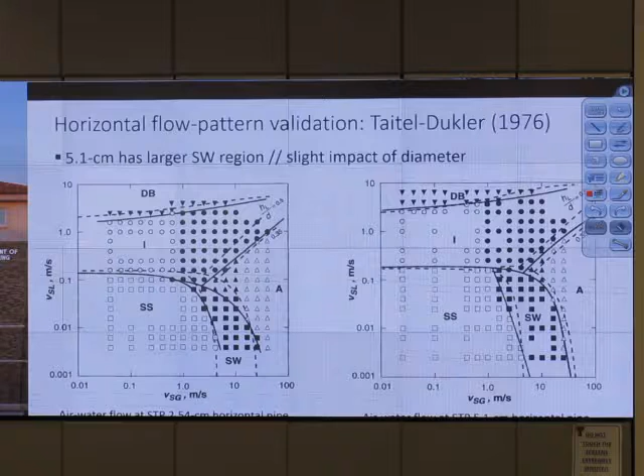Okay, for fully developed flow, you have velocity as a vector to be a function of time only. So the partial derivative of velocity with respect to length from the inlet is 0.

Good. Steady state means partial derivative with respect to t equal to 0. That's steady state - doesn't change with time. Doesn't change with length - is fully developed or not fully developed.

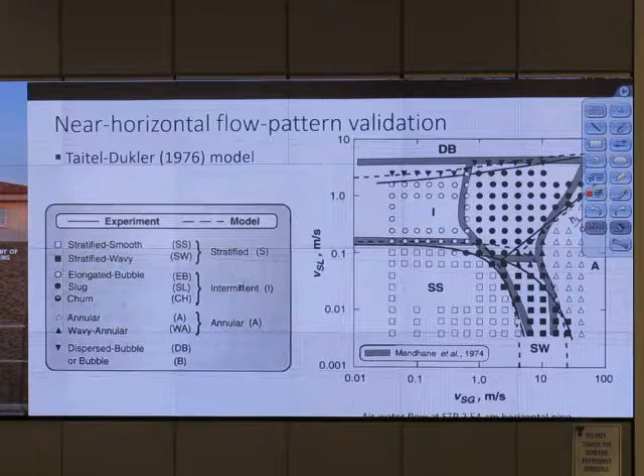Alright, let's take a look at the flow pattern map. This is for air-water flow at STP. If it is oil, the map will change, right? You have to play with the map. Did you do the homework? Submit it.

Okay, when you change the viscosity, the map changes. Why do you think the map changes, Akin? When viscosity goes up, this line kind of changes, right? Why do you think it changed?

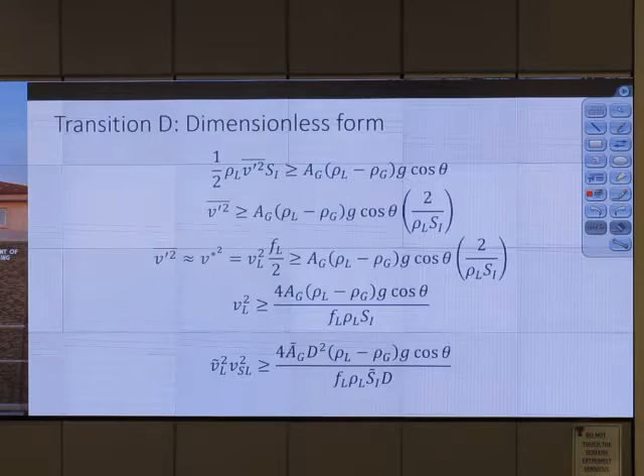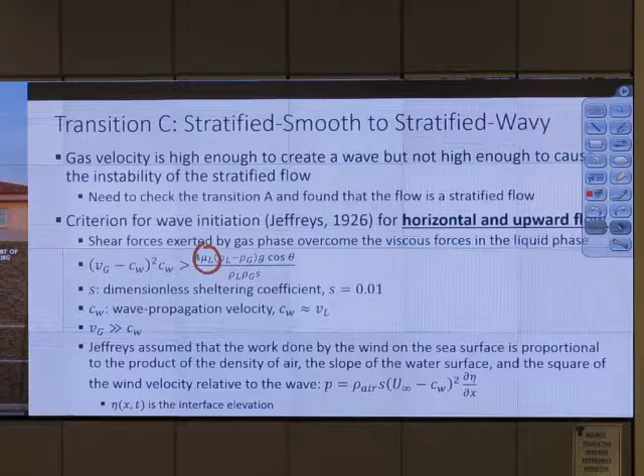Because of buoyancy - sorry, viscous force. Because several of the equations we use involve viscosity. Look at this, Transition C - that's a viscosity term, right? Okay, what about transition A? Is there anything about viscosity in it?

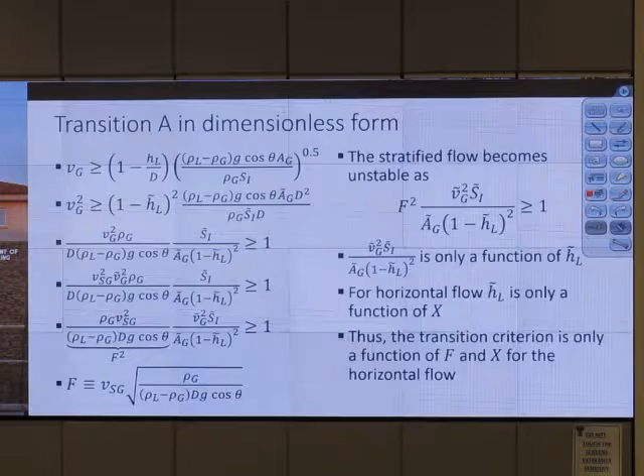How do you get HL? That comes from the chart, the plot between X and Y, right? X is dependent on viscosity, right? So equilibrium liquid height is based on Reynolds number, friction factor - so that's liquid viscosity. So that's it.

You will notice that none of your transition correlations or equations have any pressure or temperature. Do we have pressure and temperature in transition A formula, transition B formula, transition C, transition D? No temperature, no pressure.

Okay, the series Taitel-Dukler model - does it account for temperature and pressure? No. Une, does it account for temperature and pressure? Vegard, yes or no?

So it already accounts for temperature and pressure effect. So this model, even though it doesn't explicitly depend on temperature or something, it already accounts for all those things through fluid property. And at the end, it's not about temperature and pressure, right? It's about, at that condition, what is the fluid property.

One thing we don't have from the Taitel-Dukler model is we cannot discern the difference between elongated bubble and slug flow. They lump everything in this region as intermittent flow, but their model doesn't tell you that this part is elongated bubble and this part is slug - but measurement tells you. I is intermittent, SS is stratified smooth, SW is stratified wavy, DB is dispersed bubble.

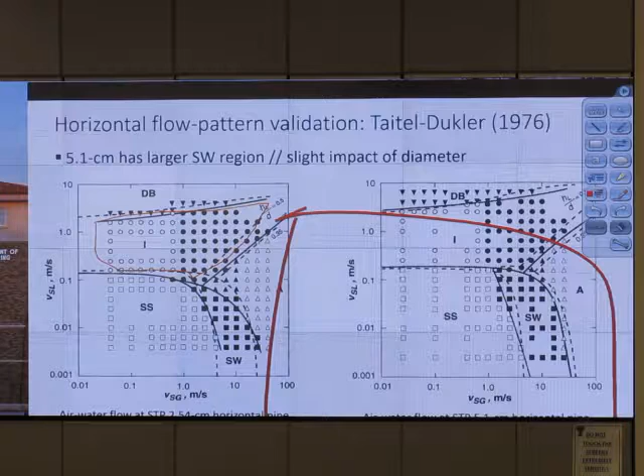So for different pipe diameters, we have different kinds of flow pattern maps. When we have a bigger pipe, the stratified wavy region - the right hand side is 2 inch, left hand side is 1 inch - the 2 inch has a larger region for stratified wavy.

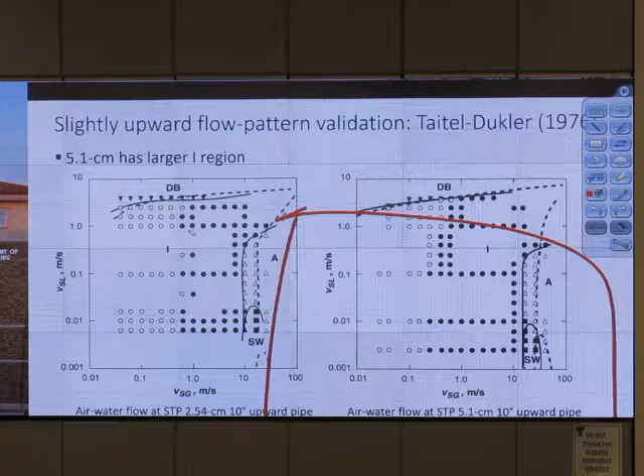So when we incline the pipe, mostly we have intermittent flow. When it is upward flow, we have intermittent. What about downward flow?

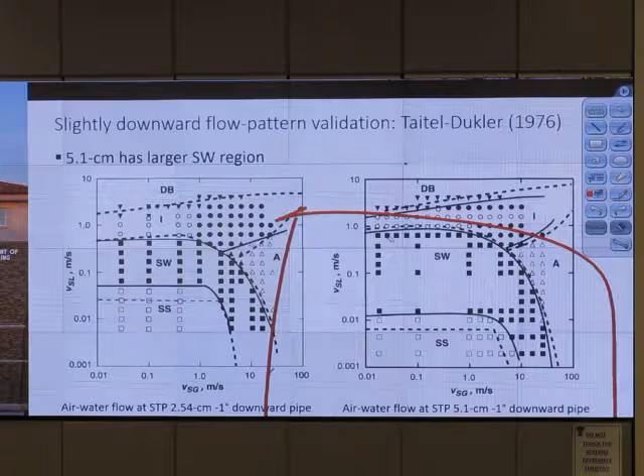So what else? After we do this, okay, that's good. At -5 degrees, stratified smooth is gone for the small pipe. For the bigger pipe, we still have stratified smooth.

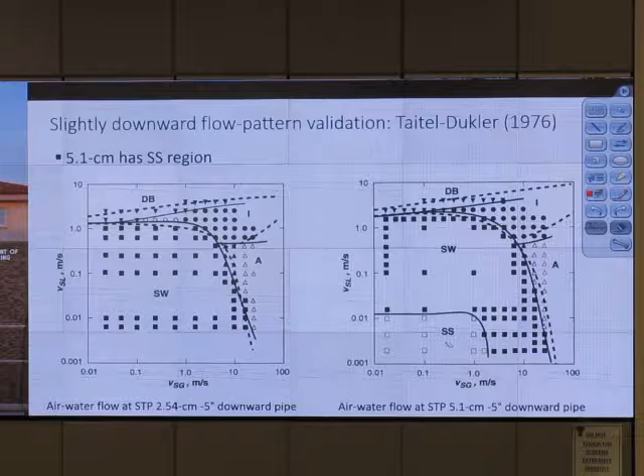At -5, -10 degrees, there's no stratified smooth, it's all stratified wavy. So the majority of the flow pattern for downward flow is stratified wavy. So if you want to guess, in a slightly inclined pipe, what kind of flow pattern do you typically have? Intermittent flow, right? For a slightly downward flow pipe, you have stratified wavy.

Okay, look at the cover of your book.

Does that give you the message? Oh really, look at the cover again. It is a pipe, right? And there's a flow up region. Is that intermittent flow? Yes. What about flow down? Stratified flow, right? No, Professor, I have two questions.

So I cannot even allow you the book, because the cover of the book itself gives you some information, okay? So in the test, don't take the book out of your bag, okay? Yes?

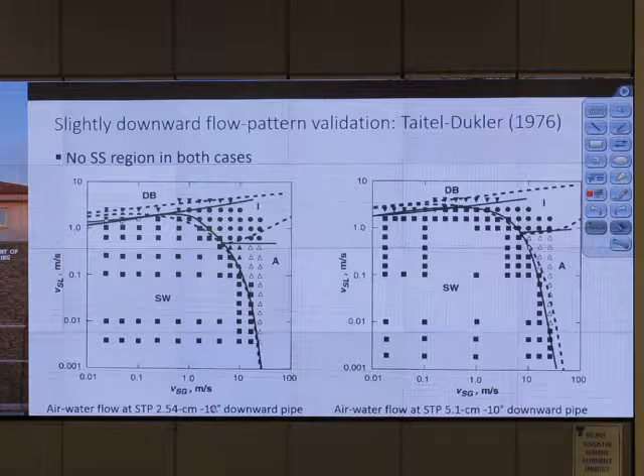And what would be a suggestion? Let's say we have 10,000 feet. So I would like to—what would be a suggestion? I don't want you to be discouraged in asking questions. I will answer that question. How about we wait a little bit until we're in that section? Okay, we are about to tell you how to do pressure drop. It is somewhat time consuming, or maybe complicated.

Okay, all right. So at the end, by now, I hope I've gained your trust that the model can predict the flow pattern for minus 10 to 10 degrees, horizontal and near horizontal. So in the flow pattern prediction, we assume tau I equal to tau G. That is in the flow pattern prediction, right?

So in actual stratified flow calculation, we should use this: tau I equal to half Fi rho relative velocity squared. And you can change Vi to VL. That is in the actual calculation. In the flow pattern prediction, we don't need that level of accuracy. Okay.

For stratified smooth, okay, the textbook suggests assuming Fi to be the same as Fg, and tau I to be the same as tau G. Okay, so this is still valid if Vg is a lot greater than VL. Look at this, if Vg is a lot greater than VL, this term kind of goes away, right? So if it is stratified smooth, let's make this assumption, okay, that's that model.

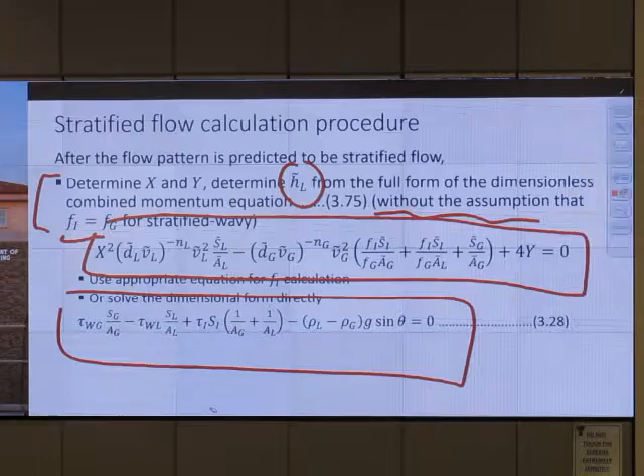Or you can solve it from the dimensional form directly, to get HL. The reason we may have to redo it is because you remember this chart, this graph from Taitel, there's an assumption there: Fi equals Fg. That is the assumption used to generate this chart.

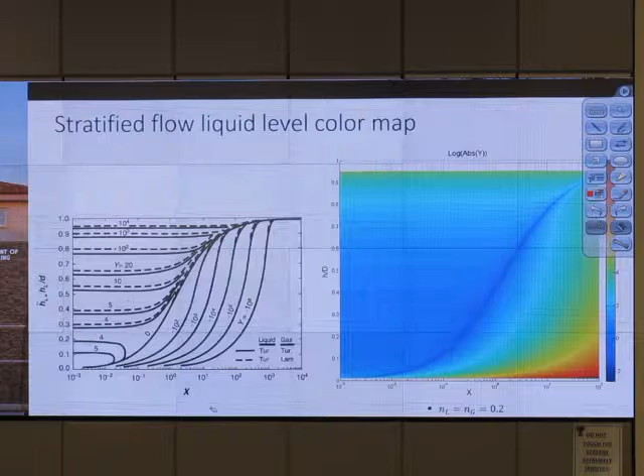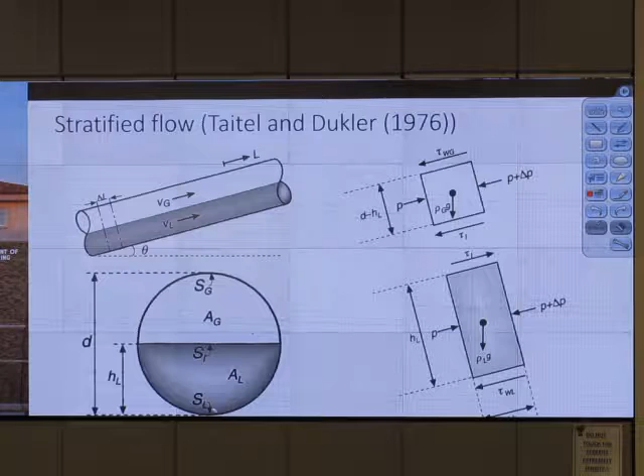Because at that time, what year was it? 1976. In 1976, you don't have a computer. Do we have a computer? I don't even know, you may have had a big computer. We cannot really calculate everything, right? So they made some assumptions to do the calculation.

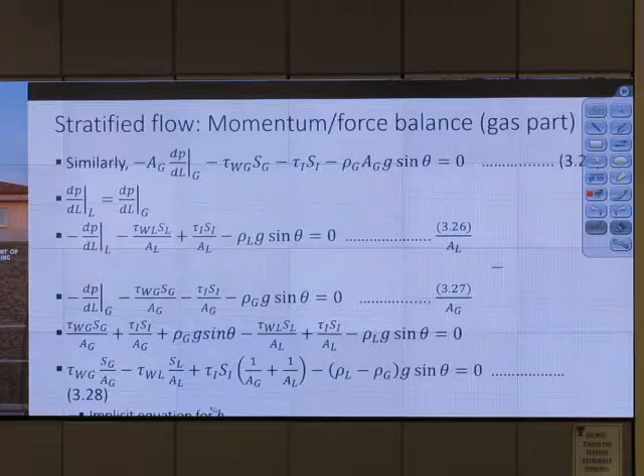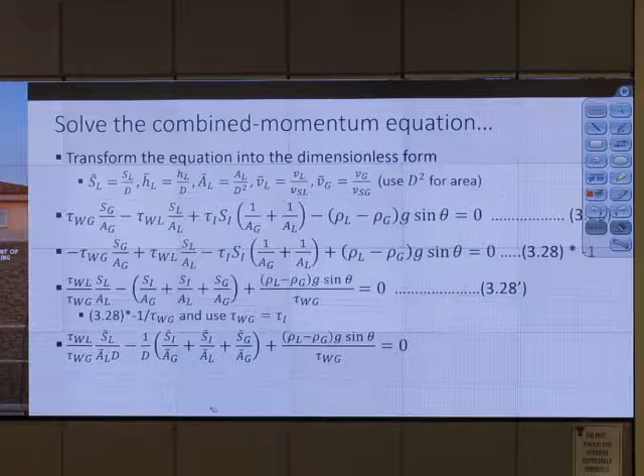So when we have that assumption, it kind of simplifies everything. Fi equals Fg, tau I equals tau G. It simplifies everything. Where did it simplify? Multiply by -1. See this one. So after we use this, tau Wg equals tau I, we get a simplified form.

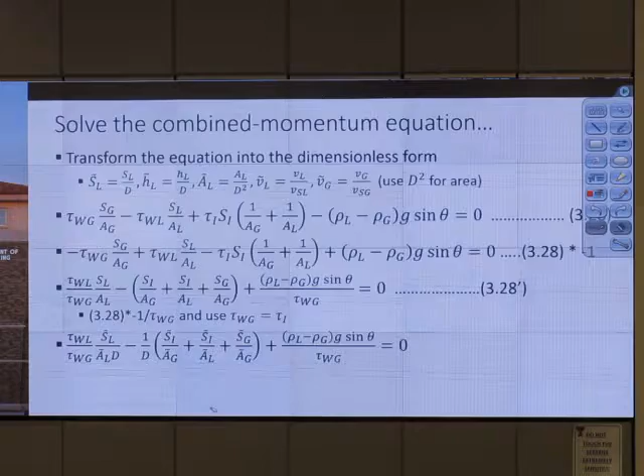But you know, from doing previous homework, that you can work on the full form without any simplification. You don't need to assume tau I equals tau G. You can use the actual form, which is... sorry, too quick.

We can solve the full form of the momentum equation and try to get HL tilde directly. So this time your tau I will be Vg minus VL, everything squared, times 1/2 rho and F, right? So you can solve the full form equation numerically and directly get the value of HL.

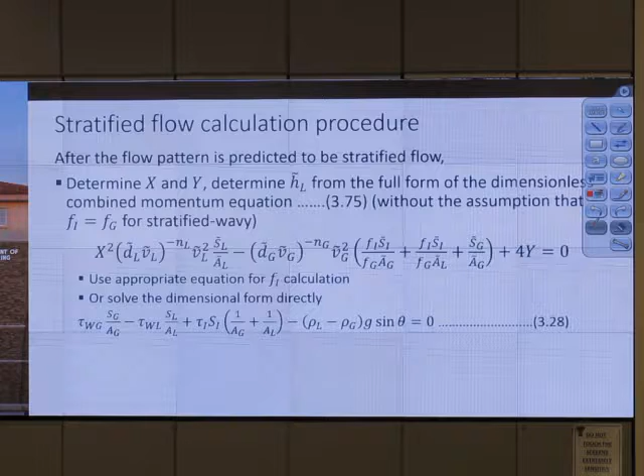That's the next step after the flow pattern is determined. After that, solving the dimensional form: solving tau Wg, rho G, Fg, Reynolds number, velocity, everything.

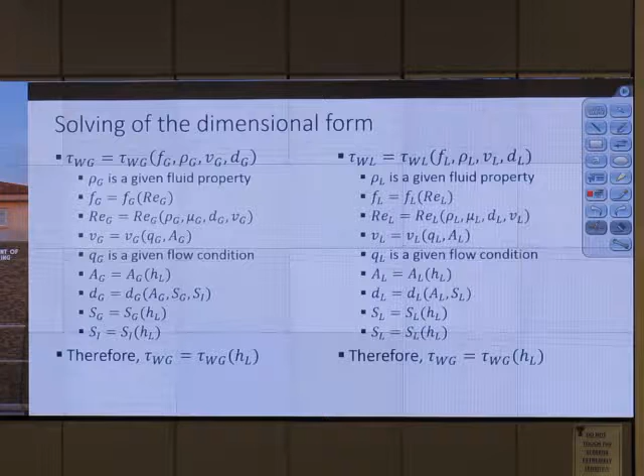Do the same for the liquid phase, because tau Wg and everything else is a function of liquid height. After we get every parameter, then we calculate...

Estimate the interfacial friction factor. If it is stratified wavy, use that, just the top one, it is correct enough. The second one is your choice, but I suggest this - that's very good already. If it is stratified wavy, we calculate Fi from that.

If it is stratified smooth, Fi equals Fg. Then calculate holdup from Al over Ap. After calculating holdup, we can calculate pressure drop per unit length from either dPdL subscript L or dPdL subscript G. Pressure drop per unit length in the gas phase and liquid phase are identical, they're the same.

So in the exam, what do you do? You calculate x, you calculate y. You use the chart to determine HL tilde. From HL tilde, you check transition A, transition B, or transition A and transition C. And if it is stratified wavy, we use Fi equal to that. After that, calculate tau WL, tau WG.

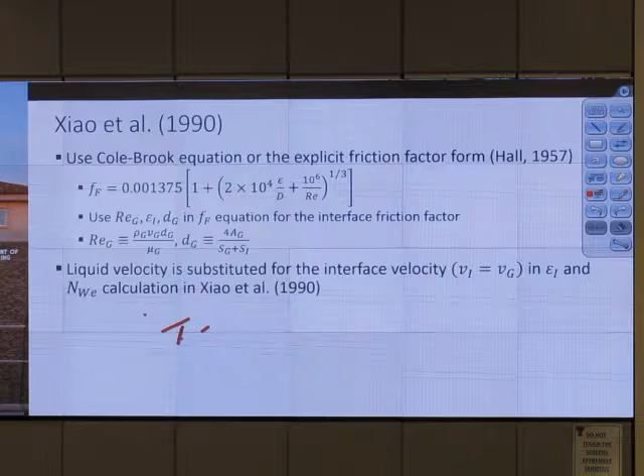0.5 F rho v square. Did I give you any of that formula early on? In the very early, you use Moody?

We have this formula, right? Tau WL equals 1/2 F rho V square. Is this Moody or Fanning? This is Fanning. We have 2F, that is for minus dPdL. Okay, this is Fanning. Use that.

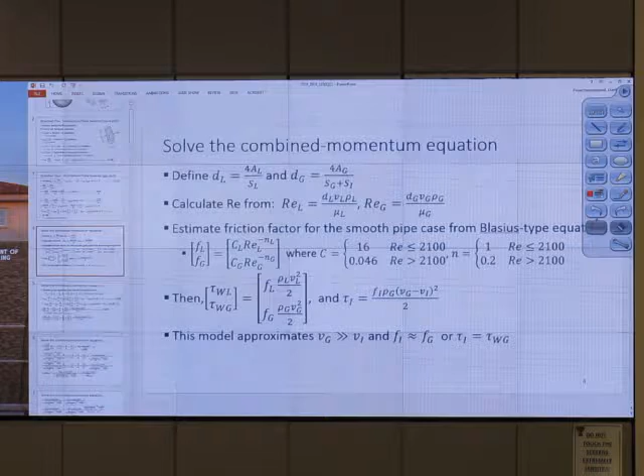So after we use those formulas, almost done. We get tau WL, tau WG, tau I. We have to, if it is, you should do it at a more accurate version.

More accurate version is instead of Vg square, use Vg minus VL, everything squared. That is tau I square. 1/2 rho Fi and Vg minus VL square. That will give you tau I. Good.

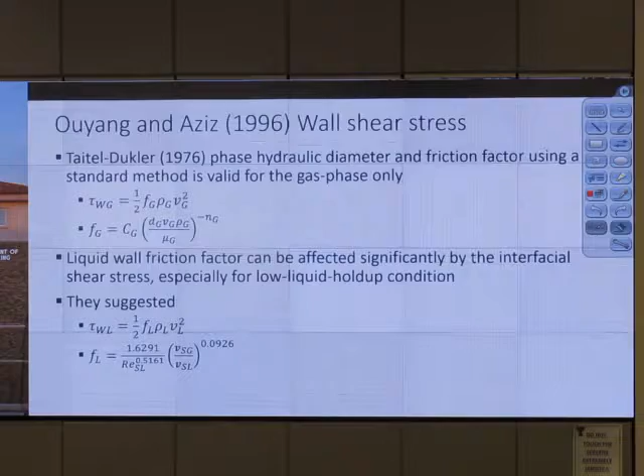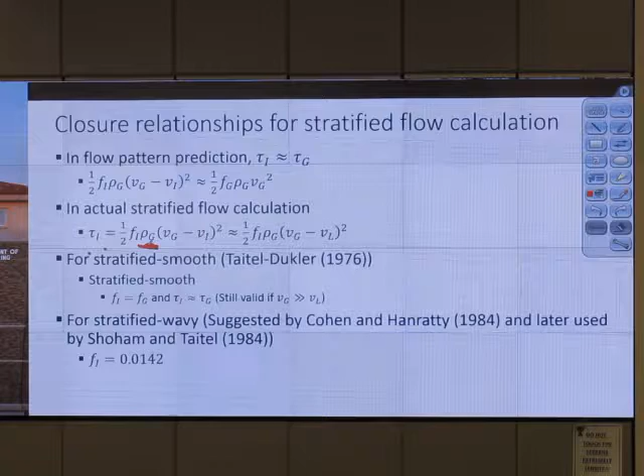So all this stuff is known. What do we do? I don't think so. Tau I, what do we typically use? 1/2 Fi rho G. Okay, rho G, relative velocity squared. So once we know every term, move this to the right hand side.

Then we get pressure drop per unit length. Done. Okay, and that will be pressure drop per unit length for stratified flow.

Good? Can you do it? Of course, not this exam. Exam after this. Or should we put it in this exam so the next exam will be easier?

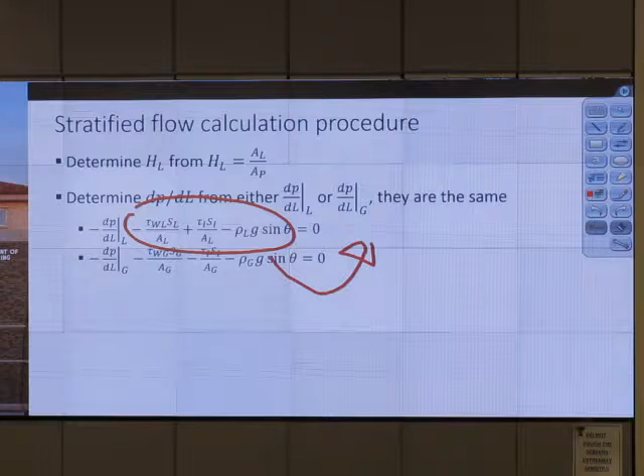This is very lengthy calculation if you notice, because to get the flow pattern is already a long process. To get X, to calculate just X, it takes you 15 minutes.

Don't you think so? You have to convert from volumetric flow rate to velocity, from velocity get Reynolds number, get friction factor for gas phase, get friction factor for liquid phase, then get capital X, get capital Y, use the chart, get the flow pattern, check transition A, check transition C, calculate, check transition K, then put everything in here. It could take like 1 hour to do this.

Especially if you don't use Excel, if you do it by hand in the exam. Yes? We have 18 minutes to the exam, so how many questions are there?

The reason for making the exam is to check whether you are very good or you are excellent. I don't want to check that. I want to check if you know it or you don't know it. Okay, just that.

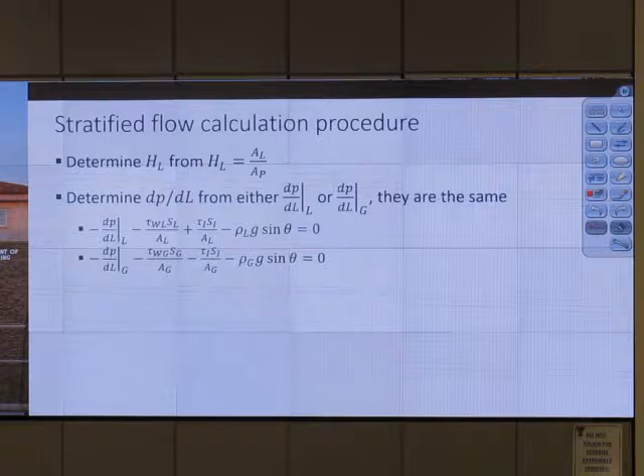I still have 3 minutes. Do you want to do slug flow? No, I have a question.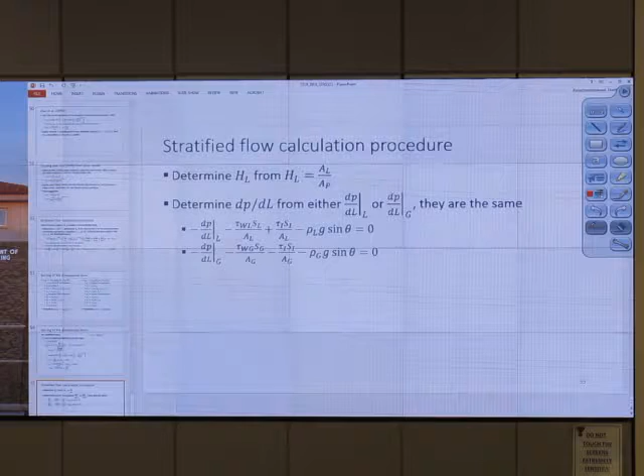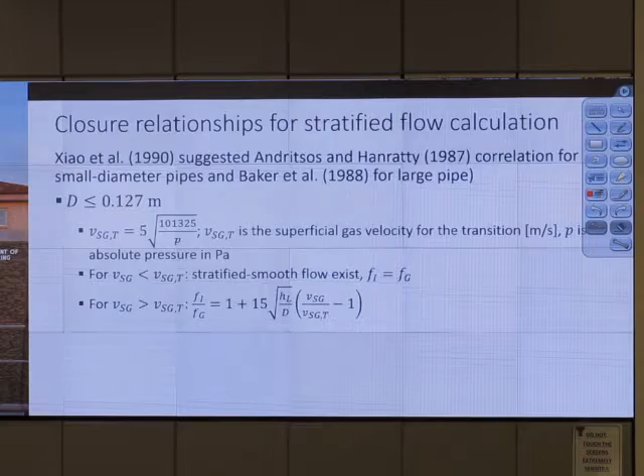So if it breaks down, if you are able to determine that it's not either A or C, that means we cannot calculate the result based on that, right? If it is, when we check and if it's not A or C, if it goes to maybe K, we can't calculate the result from this formula. Transition K will tell whether it's stratified smooth or stratified wavy, right?

But if I'm saying you don't check K, if it is stratified wavy, it's stratified. You check transition A, right? Yes, this is, and C, and now we know that this is stratified. Stratified smooth or stratified wavy? We check A. We check A, we will know that it is stratified or non-stratified. That is what we get after A.

So then we have to check whether it's smooth or wavy. Yeah, it's smooth. Is it horizontal or downward? If it is downward, you still have to check transition K. What about stratified wavy? If it is stratified wavy already, you don't need to recheck transition K.